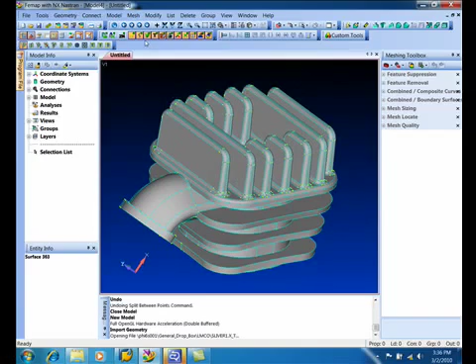A quick example of using some of the geometry cleanup tools in Femap to make a better mesh. I'll bring in here a piece of sample Parasolid geometry, and this one's actually in millimeters, so it gets scaled up a little bit. The first thing I always do when I want to find the problems of my model, I'm going to turn off some of the extra edge information here, is use our locator.

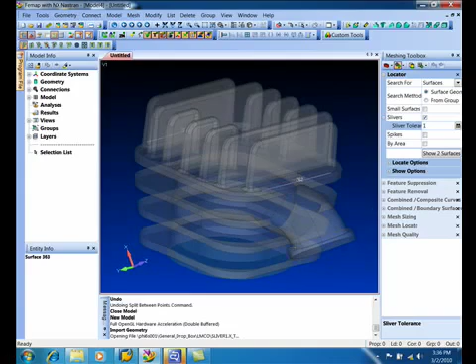And what I want to do is find sliver surfaces. And I know this part's actually about the mesh size. Later on it's going to be a little bit bigger, so let's look for things that'll fit within a 1 millimeter circle, and there's 2 slivers in this model. The first thing we'll do here is get rid of them actually permanently by cleaning up the Parasolid geometry.

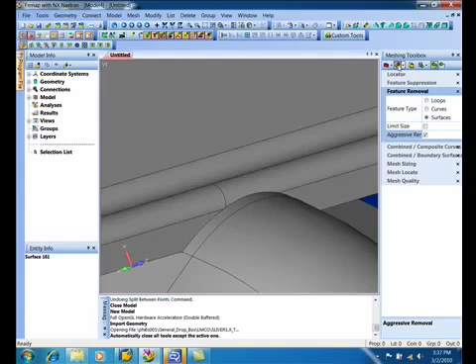So we're going to go into feature removal. I'm going to say surfaces, and this is just removing regular fillets and chamfers and things. We're actually going to aggressively squish this right out of the model. So I'm going to look at the first one, second one, zoom in here, and just go pick them. And he's going to get pulled out of the model. Go find the other guy, pick them. And let's see what else we got here.

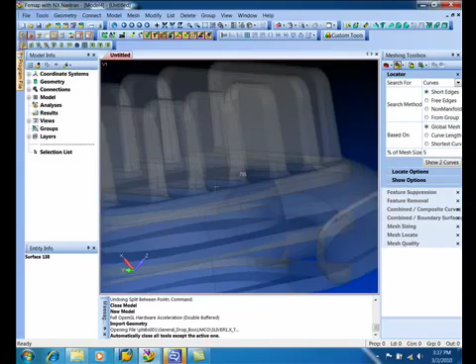Let's make sure we don't have any short edges in the model. So go back to the locator, go to curves, and let's see what we got here. There's 2 curves that are pretty short, and let's see where these are at. It zooms in. Oh, looks like we got another little ledge in here. This little flag-shaped surface. A couple of ways we can get rid of him.

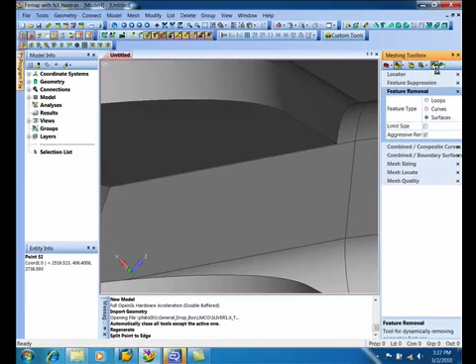There's a split point to edge, which actually burns a little split right there. So now I've got a separate surface, and then I could jump right into feature removal and get rid of him. And let's go see what we got. Looks like the exact same thing on the other side. Yeah, there it is. Let's go ahead and do the same thing there.

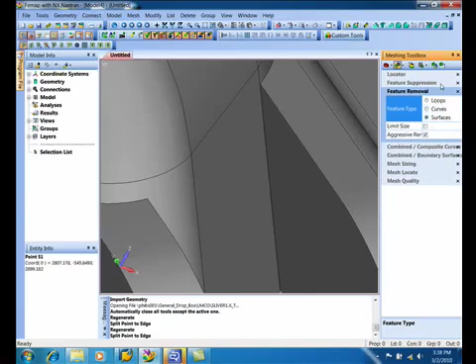So basically created one extra little face there. Then I'm going to remove it. And you can see there Parasolid geometry actually gets permanently updated. So now we've got good geometry. Let me bring up the meshing toolbar, and we'll just say mesh solid. Pick a material.

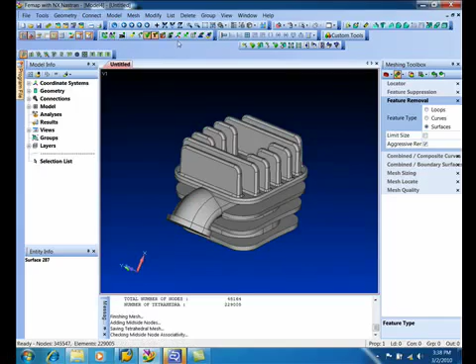Femap picks the mesh density automatically. Feed it through. Surface is meshed. It's going into the tetramesher. Loading. It's done. Now it's adding the mid-side nodes, hooking everything up to the surfaces for geometry-based loads. Let's turn everything off. And there, we got a nice mesh.